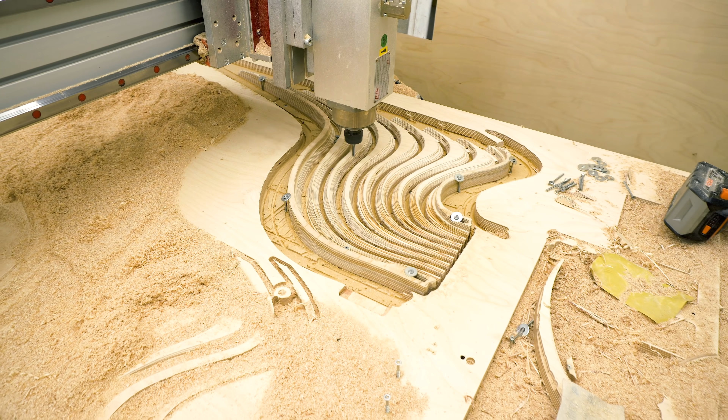So recutting this part on the CNC machine is always nervous because you need to get the part in kind of perfect position. And I had saved my zero since last time with a little mark in the plywood. So it really helped me doing this.

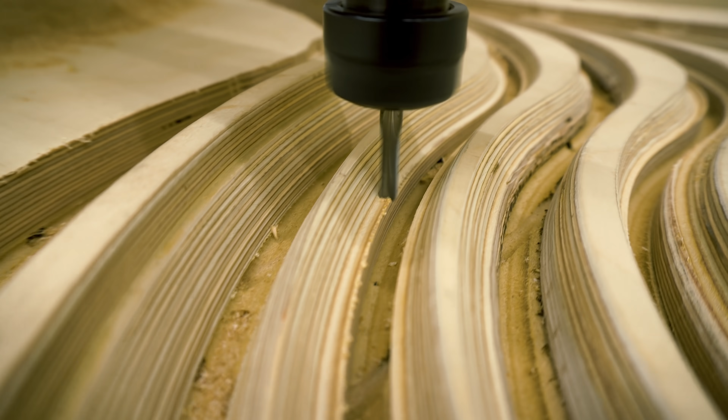So in earlier episodes, I measured the time that the marbles took in slow motion. And I'm gonna measure the time again now so we see what the final time is and what difference we have made.

Okay, let's compare. Over here is the old times from before the new angle, and now I'm going to count the frames for each lane. So let's go.

87 on lane 2. So notice how cool it is when there's multiple groups of marbles in the marble lanes at the same time. That's another wonderful effect of the lanes being slower. I would like there to be like 3 groups at the same time. That would be the best.

So the 3 last lines is after the CNC operation. So you can see there are consistently longer lines, which means that the marbles are consistently slower, which is absolutely great. It doesn't look so much difference in this chart actually. And here was right after I've been hand sanding this lane, which tells me we can actually make them slower.

Not today. I'm going to consider this mole whacked, knowing that I can put this back on the CNC machine again and maybe go even slower. The idea works anyway. I'm very happy with this result. This was important because otherwise the marbles bumped into each other and bumped out of the marble divider.

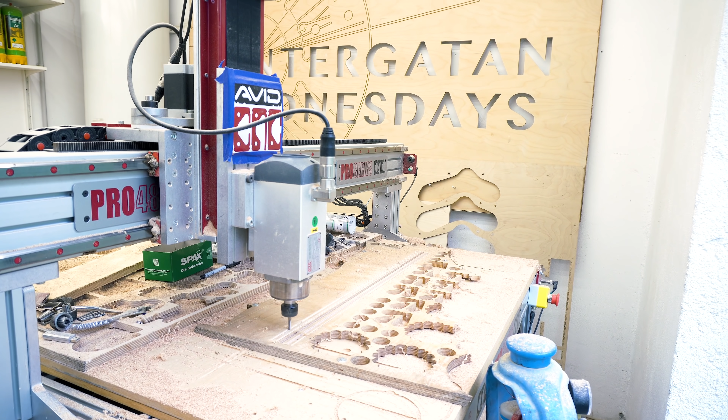I made a test track for the new marble angles. Look at this. On these test tracks, I've cut different angles of the marble lane with a decreasing angle of 6 degrees, like 60, 54, 48, 42, etc. With this, I can do real world testing in what speed I actually want from the marbles. I'm going to release the marbles at the exactly same time, and you should see a nice spread of the marble speed.

How beautiful is that? By using my angle finder, I can then get a better idea when I cut the first part. Actually, pretty good demonstration. You see, the fastest lane was the only one that jumped out. That's a pretty good demonstration of the issue I had when the marbles were too fast and jumped out of the marble divider. The other marbles stayed within because we controlled their kinetic energy. Anti-gravity marble lanes. So this is the slowest path. Wow, it still goes. That is so magical.

Anyway, this gets me excited. This is going to be so cool. And learning how to deal with gravity and learning the physics of marble lanes, I mean, for a marble machine builder, that's essential knowledge. So we're doing it again for science.

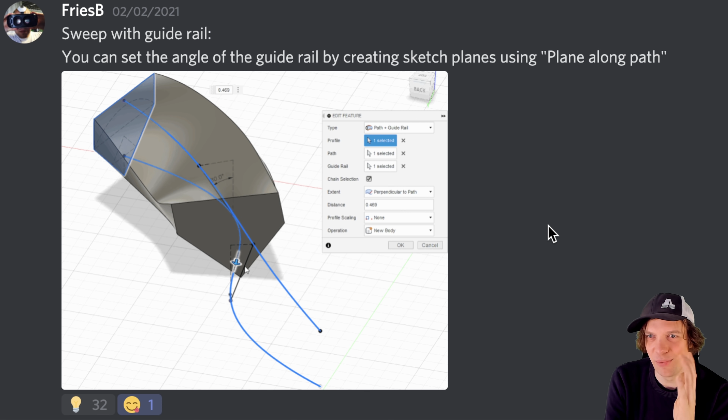FriesB on Discord has provided this information. Thank you so much. This is exactly what I was looking for. This makes me so happy. Of course you could do something like this. This will make it possible for me to make a parametric design exactly the way I want to do it.

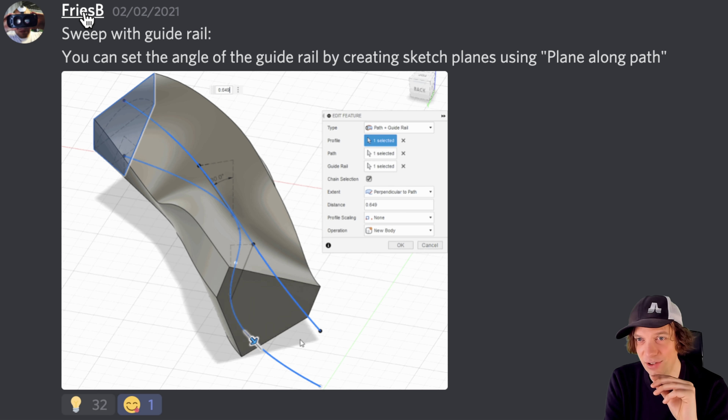I can't praise this post enough because it's so efficient in its amount of information, and the little GIFs showing exactly everything I need to know are right in there, visual, easy to read. Plus the username is of course connected with playing disc golf. So the only thing missing is of course a butterfly. Well done, Wilson emoji. There, the flying butterfly.

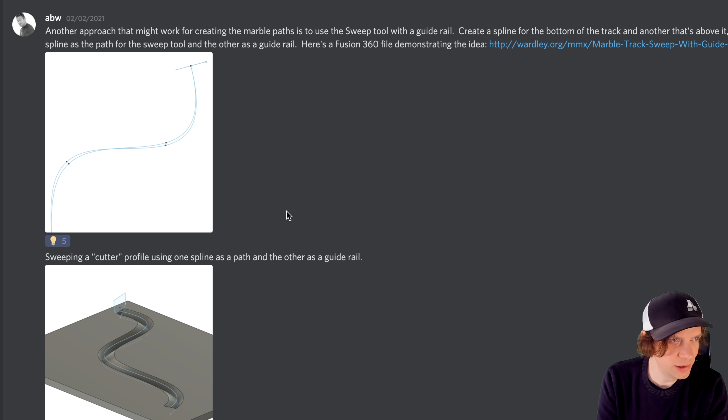Captain Context, you get a Captain Context because everything we needed to know from your post was right in there. All the context needed. Perfect. So the user ABW has exactly the same suggestion. He shows here the spline lines and then how you can use the sweep. So that is absolutely great. It's the same idea. I'm going to give this yummy emoji and Wilson loves it emoji.

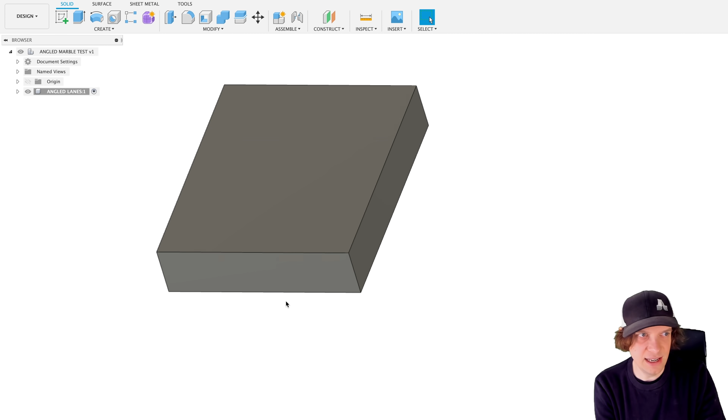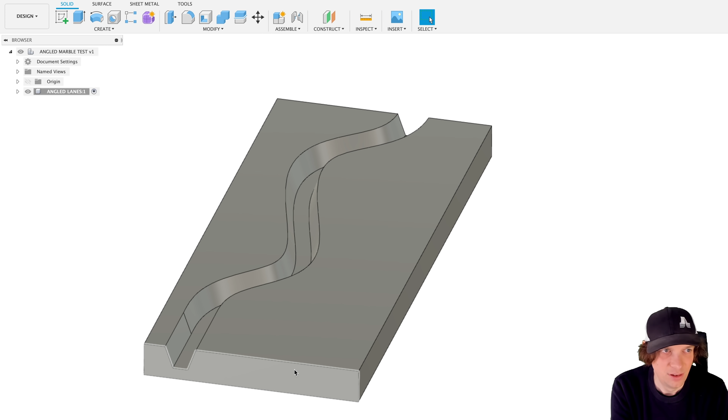In total, I have 4 parameters: the angle of the lane itself, and then tight curve, medium curve, long curve is how much we're going to lean the angle in each curve. I'm just making a random block of 18mm plywood here. So this blue field is now our profile. That's the shape of our marble lane. And now we need to do the snake to tell it where we want it to go, the curves. So I'm going to make a random curve here, doing some tight bends and some long bends. It's beautiful already.

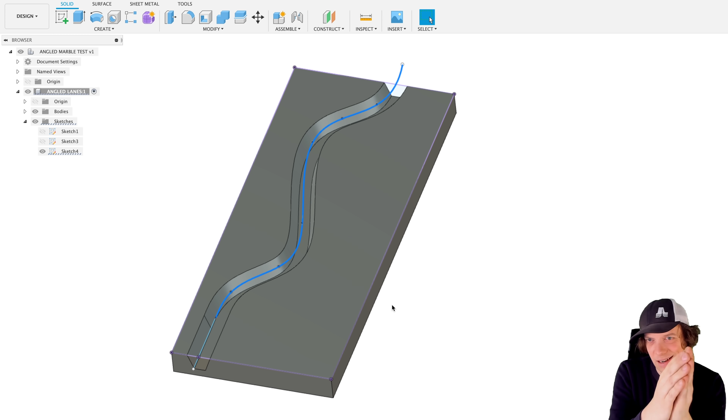So this is what I thought the sweep was limited to do. But no, if we look in here, we can have a path plus a guide rail, and this is where the magic really kicks in. This snake line is our marble path. This is the curve for the whole path. And now I'm going to make a guide rail for the angle. And I want the guide rail to be kind of linked to the path line. So now we're going to actually project something and use the projection link. So now you can see I can move around the top snake without the guide path going crazy. It follows. And it's actually not exactly under it. It's very, very nice because I've constrained it to the projected sketch line.

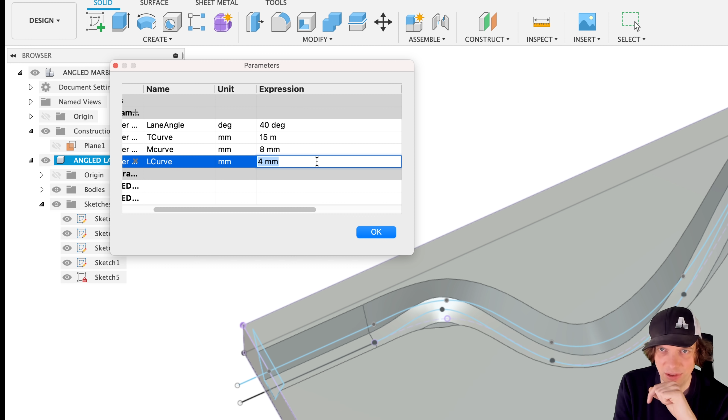So now if you see the angle of this curve there, that's a long curve right now. I can just change the angle on all my long curves in here. 8. Boom. Let's do almost straight, 2. Look at that. We have global parametric control over the curves in all the CAD.

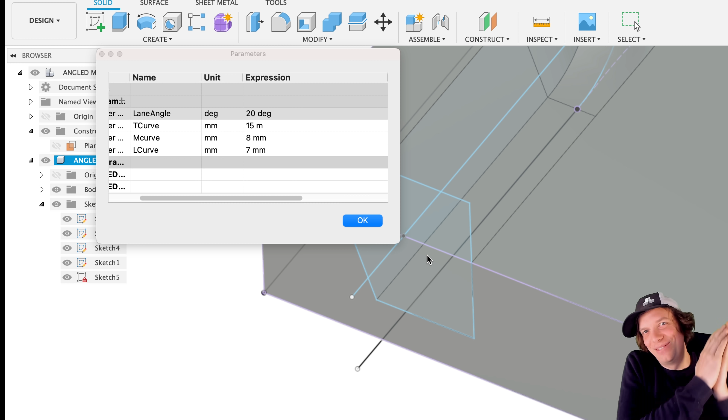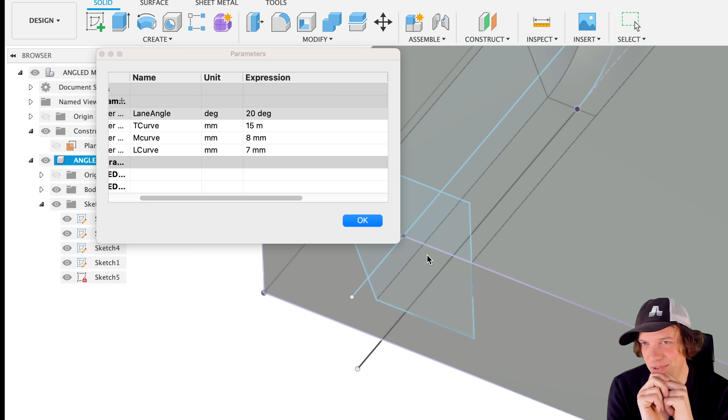That's enough for today. This is why I started this project. I love to learn. Once Discord showed me, opened this Pandora's box, there is no return. I'm not going to finish something that I can do better. And I do think I'm spending my time quite well, actually. I'm, of course, in a deep rabbit hole, but I'm learning how to battle gravity with these marbles. Finding out these CAD skills is way worth it because really understanding how I can control marble speed in different sloping degree angles is quite cool. I absolutely love this. I'm so motivated now to really make an awesome first principles perfect design.